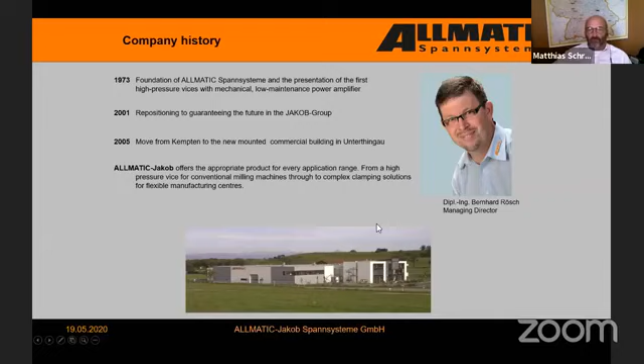In 2005, we built a new plant outside of Kempten, and we moved to this plant, located deep in the south of Germany, close to the border of Austria, and also very close to the famous castle Neuschwanstein. Our company has around 60 employees and 15 to 16 trainees.

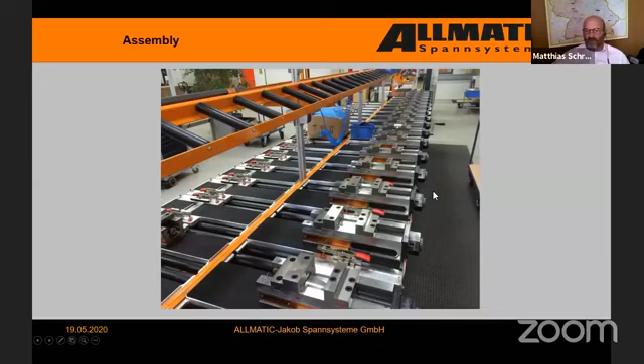Some pictures from our milling department, from inside our company. You will get a video after that. That's our milling area, the grinding division, and the assembly. We assemble the devices in batches between 20 and 100 pieces. I can give you a short video.

Hope it will work. You can see also some snow because we are in the south, very close to the mountains.

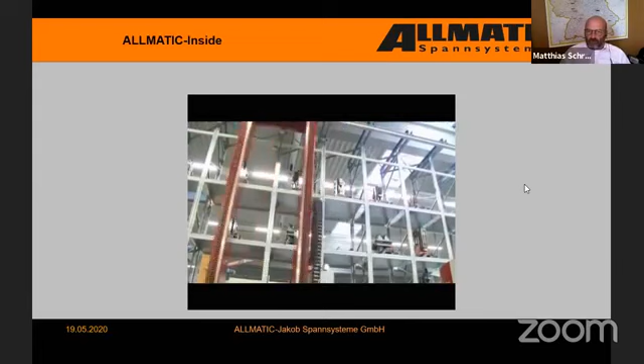Everything is developed by ourselves in our company. We design our products in 3D data, and we produce all the parts and all the devices ourselves. We buy only some screws and small parts; all the other items we need are produced in our factory in Germany.

We use a pallet system from Liebherr connected with two Starrag Heckert machine tools, so we can work without people for one shift.

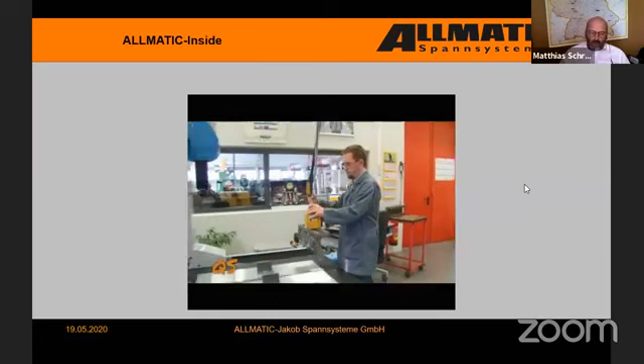Our grinding division is climate-controlled to get high accuracy. For measurement quality control, we don't control every vice; from time to time we keep some samples from the production and check them.

This is our trainee area. The video is not brand new; we've already changed this measuring tool to a newer one.

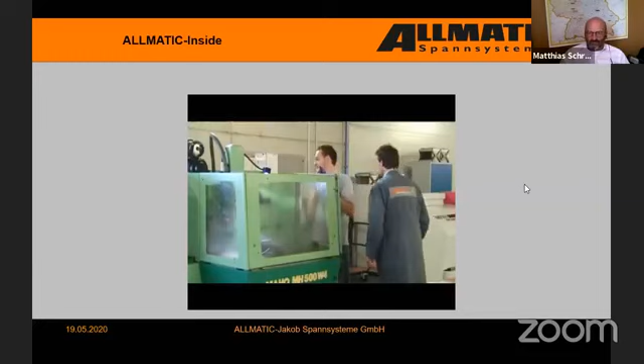And you see, we use our vices also in our own factory.

In 2005, we were the first company to offer gripper technology for workholding, especially for milling machines. Then in 2010, we designed the Central Grip as the next development step of the T-Rex.

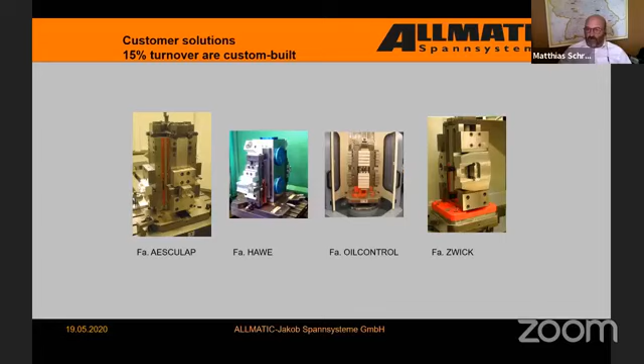The other 15% of our turnover are customized solutions in the shape of clamping towers, setups, special jaw solutions, and so on.

Generally, we divide clamping into two clamping ranges or clamping arts. On one side is conventional clamping, meaning you have a right-angular or parallel workpiece which you clamp on flat jaws.

On the other hand, Allmatic was the first company to develop gripper technology, which gives us the possibility to clamp raw, unmachined parts, castings, and so on — which was not possible to clamp before on a simple vise.

In former time, Allmatic's starting product range was the basic vise. This basic vise we removed from our product range in 2018, but these vises are still under production, under license by AMT, under license from Allmatic. It is branded now for the Indian market, and maybe also for the Asian market, as AMT Allmatic Vise Basic.

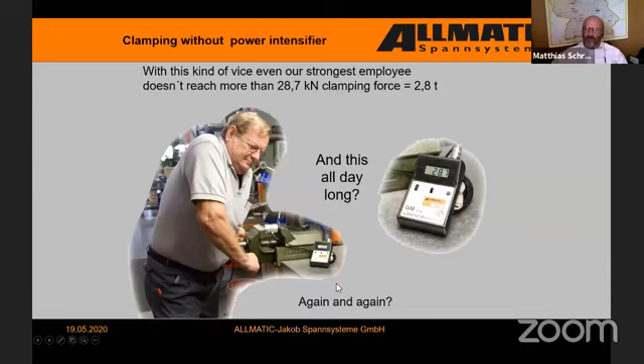With this kind of vises, it is very strange to work, because our strongest guy in the company reaches only 2.8 tons, and he has to do it, or the operator has to do it, the whole day again and again, and that is really bad for the employees. That was the reason why we developed a vise with power intensifier, with power booster. With this kind of vises, even a small lady can reach 4.5 tons or more with very little torque, with very little force. So it is very pleasant, very comfortable for them, and they can do it the whole day again and again, no problem.

The heart of such vises is the power intensifier or power booster, which is fitted into the spindle. We have a very small area, so these items are really small. We have to differentiate between two types of power intensifiers.

In former times, and also a lot of our competitors, especially from Asia, still use hydraulic power intensifiers. That means this is a small hydraulic cylinder where we have a change in the volume of oil. You make a big stroke with low force — that's the torque coming from the hand crank — press the cylinder into the oil, and we transmit a big stroke with low force into a small stroke with high force. So we get the high clamping force at the vise.

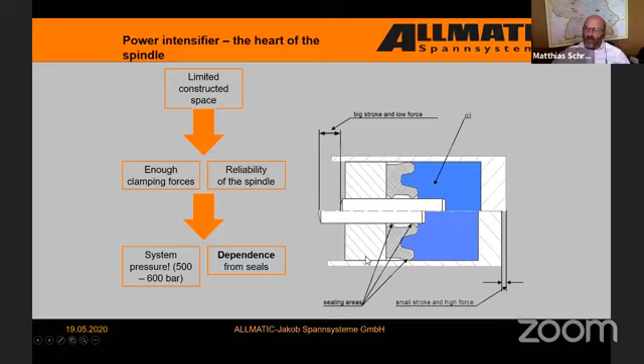The problem with this kind of power intensifier is the leakage of oil. During use of the vise, the sealing area will wear, and so you have a small leakage of oil, and in this case the clamping force will fall down during the machining. And because the power intensifier is inside the spindle, the high pressure spindle, you can't see if there is any small leakage of oil, and you can't feel that the clamping force is going down.

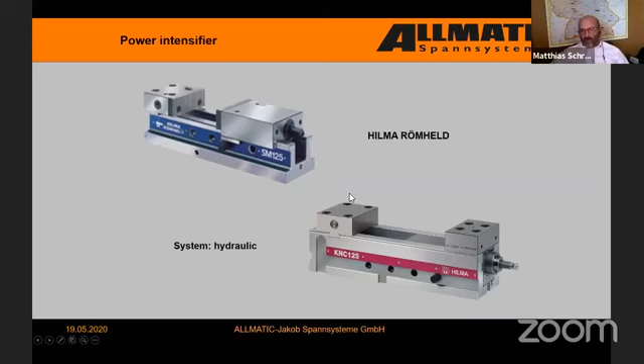Such power intensifiers are still being used also in Germany. For example, our competitor Hilma Römheld is still using this kind of power intensifier on his newest vises, because, in our opinion, it is not safe with the oil with the hydraulic cylinder.

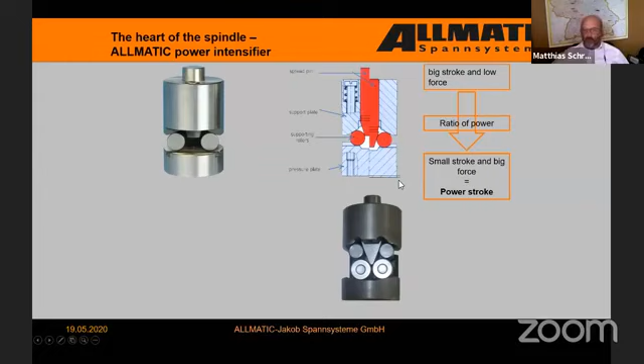Allmatic developed a mechanical power booster, power intensifier. We are working on the same base — we have a long stroke in this area. We press this pin between the rollers; by spreading the rollers, we transmit this long stroke with low force into a small stroke with high force. So the procedure is similar to the hydraulic version, but there's no risk of losing any oil, so we are clamping very safely. This stroke is important for the clamping force — I'll come to this later again. Here you can see how the pin is spreading and transmitting the long distance into a small stroke of the pressure plate.

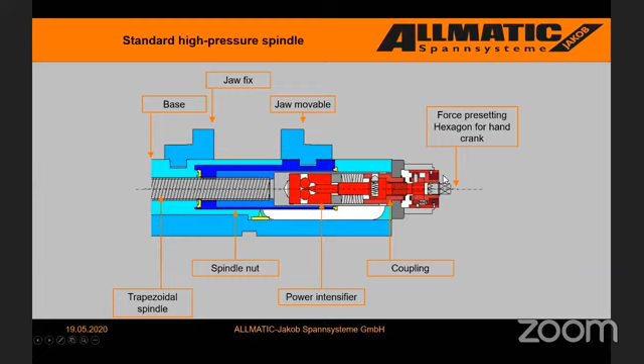Here we can see inside our high pressure spindle. In the area of the hand crank, you can pre-select the clamping force. For smaller vises, you can select it in 11 steps, starting from jaw width 125. You can pre-select the clamping force in 4 steps. So you turn the main spindle with a hand crank. You put the hand crank on the hexagon, turn it, then the main spindle, the main thread spindle, transmits the movement over the spindle nut to the mobile jaw.

If the mobile jaw touches the workpiece, this coupling starts working. The main spindle stops, and the internal spindle starts to work, pressing this thread spindle, pressing the pin between the rollers, like you have seen before. Spreading the rollers produces the small stroke, which moves the whole system, including the main spindle, over the spindle nut and mobile jaw, pressing with high pressure onto the workpiece and clamping the workpiece with high pressure. We will see also a video about this later.

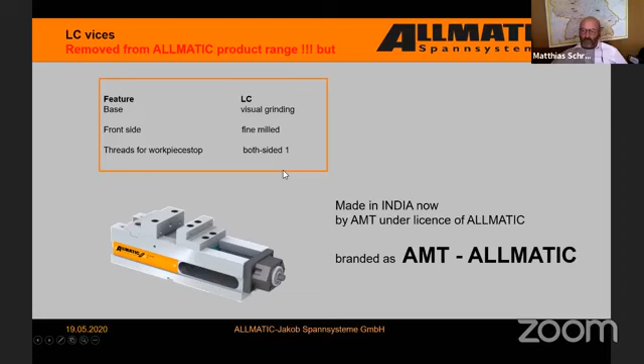Allmatic replaced these 2 types of vices with one vise. So we developed last year the NC8 vise. It is a perfect vise which has all, or nearly all, the advantages of the TC for nearly the price of the LC vise. So the NC8 is ideal for everyday use on milling machines, especially on 3 and 4 axis machines and milling centers. It is used for conventional clamping.

As you remember, we divide clamping into two kinds: conventional clamping and Gripp clamping. The NC8 is for conventional clamping. So you see, we have flat jaws, and the workpieces should have a parallelism better than 0.1 millimeter to get a safe clamping.

We offer this vise in 4 jaw widths. The smallest one is the NC90, meaning the jaw width is 90. The pre-selection at this small vice, as I told you before, you can pre-select in 11 steps. The reason is that smaller workpieces need better adapting of the clamping force to the workpiece. That's why you can pre-select the clamping force in 11 steps at this small vise.

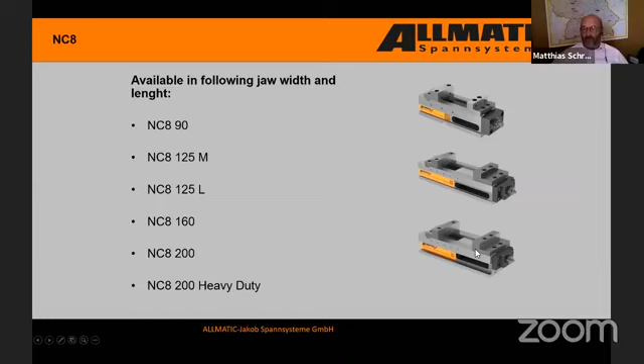Here you can see the two different NC8 125 vises. This is the most common jaw width, 125. That's the reason why we offer two lengths of these vises. The spindle inside is the same; only the body is longer. And if you want to enlarge the clamping range, you have to put the fixed jaw to the next slot.

One new feature of the NC8 is that we can pre-select the clamping force by hand. At our old LC/TC devices, you needed a hexagon wrench to pre-select the clamping force. Now, at the NC8, you can do it by hand. You pull this item, turn it to the next step, and press it in again. So it's very easy.

The clamping force is constant and repeatable, like every high pressure device from Allmatic, by a mechanical power intensifier. I have shown you this power intensifier before.

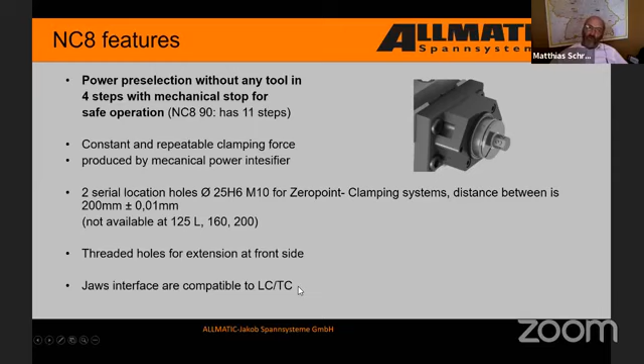All the jaws are compatible to our old LC/TC devices and also to Titan devices. That means if you have bought, for example, an LC device from AMT, then you can use the same jaws also on our NC8 device. The body is ground on all sides for lateral application also, in a tolerance from 0 to minus 50 micron.

The geometrical dimensions of the NC8 are the same as LC and TC. The same I said before. You can use this device also together with the device from AMT, with the LC 125, for example, from AMT. On the side, we have lateral holes for the workpiece stop. You will see it also later.

We have the possibility to connect an angular drive, so that, for example, if the hand crank is in collision with the machine table, you can use an angular drive to turn the hand crank over the machine table. And we have a QR code for access to all technical information, accessories, spare parts, and also repair prices.

In this video, you can see again the function of the main spindle, or of the device, of the high pressure spindle. You put the workpiece inside, move the mobile jaw with the main spindle to the workpiece, then the coupling is working, and the internal spindle presses the bolt between the rollers, spreads, and produces the high pressure over the spindle nut to the mobile jaw.

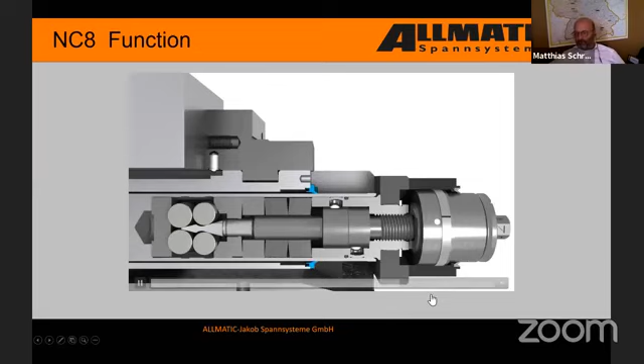The pressure selection by hand, as I told you, you pull this item and press it again back. So we limit the way which the bolt is going, so we can reduce the clamping force and can adapt the clamping force to the required force or the requirements of the application of the workpiece.

All our high pressure spindles are protected by rubber seals, which gives you the guarantee for trouble-free use of these devices. Because it is very important that no chips go in this thread between spindle nut and main spindle, because if this thread is blocked, the coupling of the power intensifier can start working before the main spindle or the mobile jaw has touched the workpiece, and you will not clamp.

So it is very important at all vices, all high pressure vices, not only ours, to protect and clean the main spindle and the spindle nut. There should not be any chips coming into this.

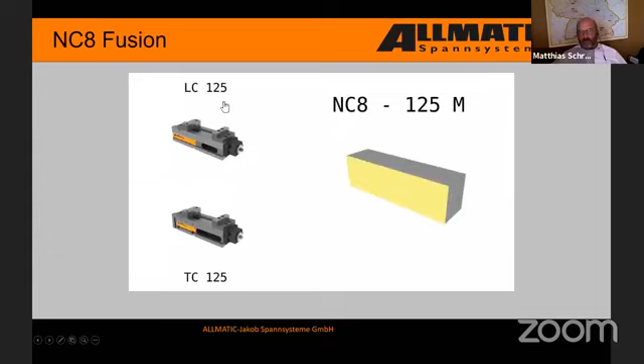So you can see some videos for the fusion of LC/TC I told you we had before. Yeah, LC/TC is still produced by AMT now. So in former times, I told you we needed a hexagon wrench to pre-select the clamping force. Now we can do it by hand without any tool.

The new LC has nearly all the advantages from the TC version. It is ground all around. We have the positioning holes for zero-point clamping systems. We have the threaded holes on the front side to use an enlargement, and the device is ground to use it also on the lateral side.

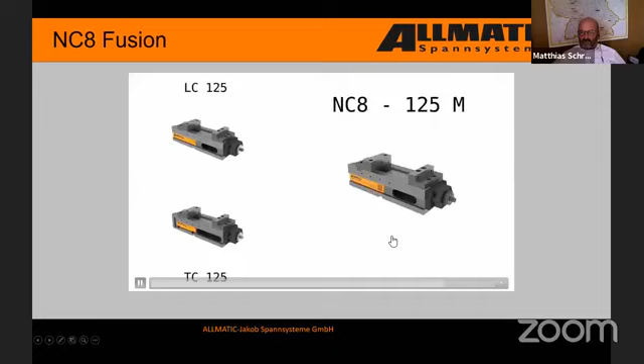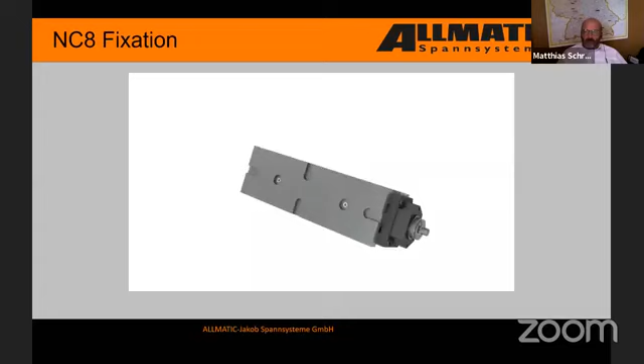Fixation, I told you, we have side shoulders. You can use it, or you can use the zero-point clamping system. As I told you, it fits to a lot of zero-point clamping systems. So you can align it by the aligning slots with aligning stones on the machine table and using side clamps. That's a traditional fixation of the vise.

One more feature is our click system. So devices are prepared to use parallels, which you can click in front of the step jaws, or you can click also some soft jaws or some prismatic jaws on this.

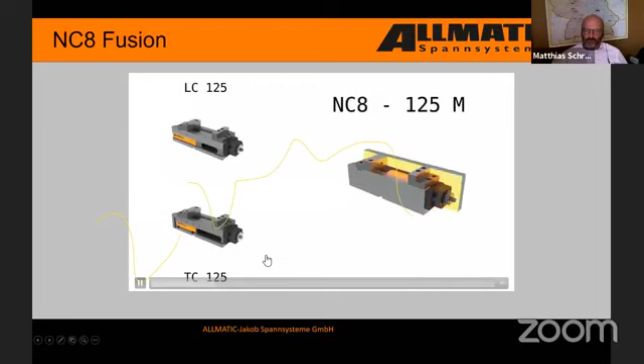I think we saw this also already. Sorry.

Yeah, the angular drive, I told you already, is also a feature. If you want to fit the vise in the middle of the machine table, you cannot turn the hand crank. So we offer an angular drive to come over the machine table, so that you can move the jaws and clamp by hand crank over the machine table.

Enlargement, I told you we have 4 threads on the top side, on the front side in this area, so that we can use an enlargement to get a bigger clamping range. This is not available for the jaw width 90. And 200 is also not available, but from 125 to 160 it is available. So you see we can get a very, very big clamping range.

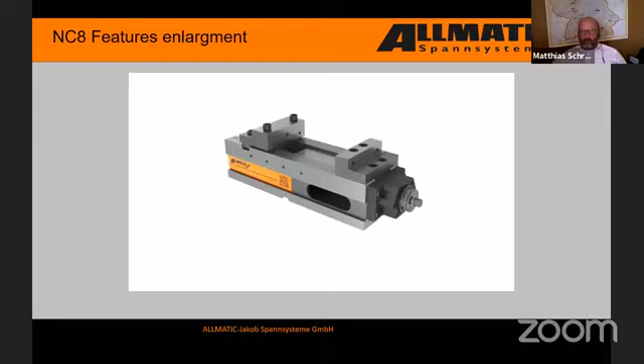The workpiece stop, as I told you: at the LC vise we formerly had only one thread, but now, like at the TC version, with the NC8 we have 4 threads to position the workpiece stop in different areas.

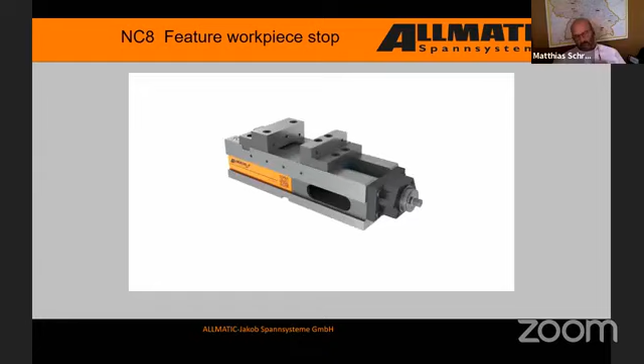One summary of the fusion again. We put these 2 types of vises together into one vise and give it all or most of the advantages of our top class version, and with the price we are closer to the low cost version.

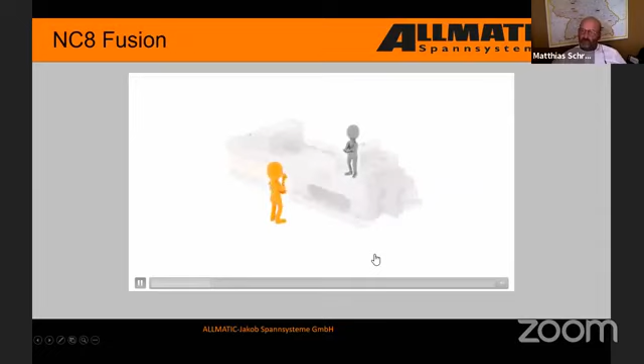Once again, we have 0-point clamping systems. The vises are prepared for that. We can save money by pre-selecting the clamping force, because we don't need any tool to change it.

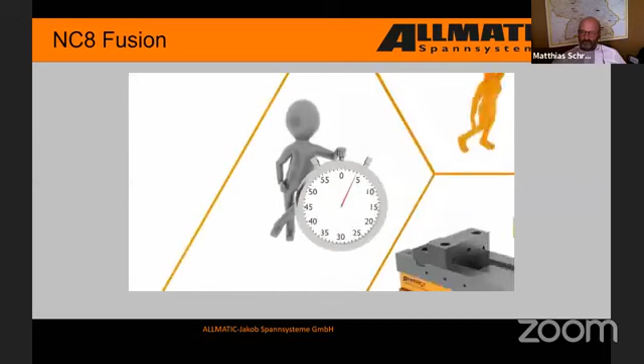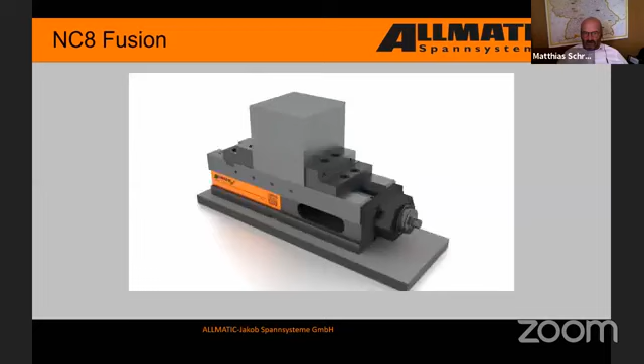The vise is ground on the lateral, bottom and top faces. So we get a very high accuracy and very good parallelism of the workpiece. All the jaws from LC and TC fit the new NC vise. So if you already have a TC or LC vise, you can use the jaws also on the new NC8. And so you can use them side by side also.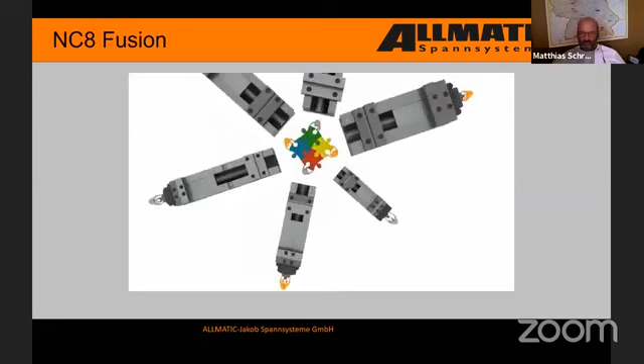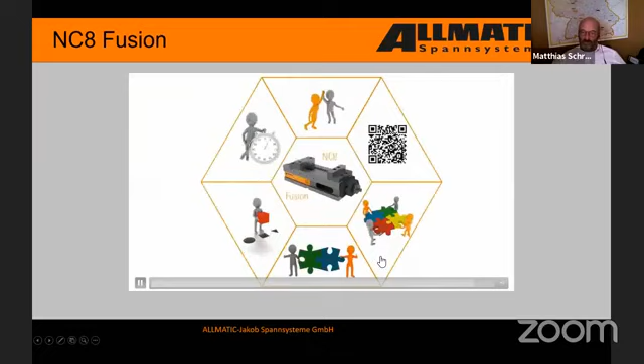In conventional clamping, we also have a double vise. This vise also has a high pressure spindle. You can pre-select the clamping force in 6 steps, but you always have to clamp two workpieces. You cannot have one empty. You always have to clamp on both stations. And the difference between the raw parts can be maximum plus minus 3 millimeters.

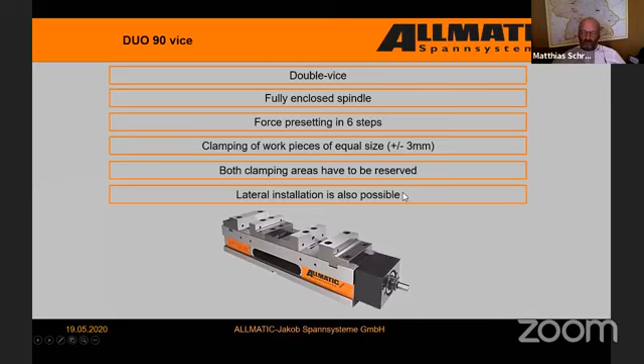We also have the click system. As I told you already, the compensation is plus minus 3 millimeters of the workpieces. The sealed spindle, the mechanical power intensifier, the high pressure spindle, pre-selection within 6 steps, and the aligning slots on the bottom face, and also the 0-point clamping system holes are available on the bottom face of the vise. Important: you have to take care that you always clamp two workpieces. It's not possible to clamp only one component.

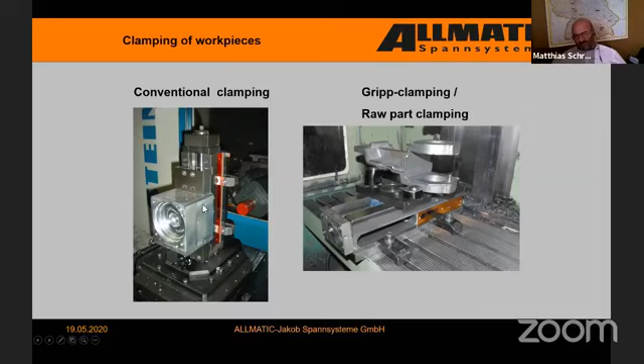Okay. That was the information regarding our conventional clamping vises, NC8. Now we are coming to the Gripp clamping, the clamping of raw parts, where Allmatic is still the leader in this technology. You see, such a workpiece you can't clamp in a conventional vise. So that was one reason to develop the Gripp clamping.

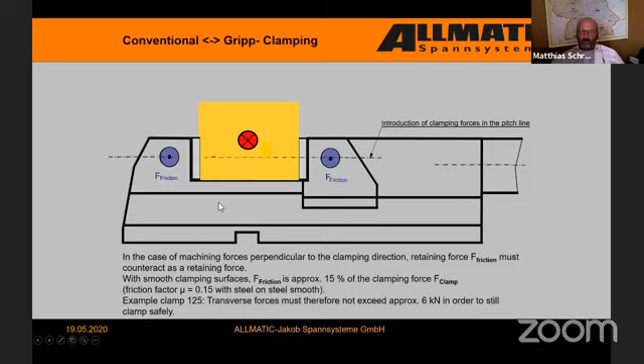The disadvantage of conventional clamping is that only friction holds the workpiece in lateral direction against the cutting force. That means only friction is holding the workpiece, and the friction force is only 15% of the clamping force. If we clamp the workpiece conventionally with 40 kilonewton, and we have only 15% in lateral direction, then we have a holding force of only 6 kilonewton fighting against the cutting force. That was the other reason why we developed the Gripp vise.

Here we see the 2 types. On top, we see the standard, conventional spindle. I told you already how it functions, and you also saw the video. And here we see the Gripp spindle. The main difference lies in this area: we have another power intensifier inside. The stroke of this power intensifier at the Gripp spindle is much higher than at the conventional clamping, because we want to press teeth into the material.

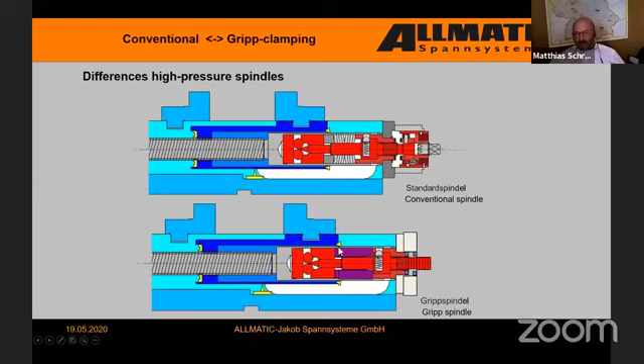We need a longer stroke to press the teeth into the material and to establish additional clamping force. And you see, we have no soft items, no springs inside the spindle, because we need very hard clamping, since we want to press teeth into the material, as we see later. If you have teeth which should go into the material and we had soft elements like springs in the spindle, we would press back against the springs. So it is not possible at the Gripp spindle to use soft elements like springs. So we have a very hard clamping. Here I will show you the differences between the standard spindle and the Gripp spindle.

The standard spindle will be operated by a hand crank. The Gripp spindle, we use a torque wrench. We need a torque wrench because we adjust the clamping force by that. Because the stroke of the power intensifier, as I told you, is much higher. And we don't know how hard the material is that you want to clamp. So we have to limit this clamping force, and this we are doing by a torque wrench. I will explain it later again.

I told you already, we have weak elements like springs in the standard spindle. We have a hard clamping without springs at the Gripp spindle. With the standard spindle we can adjust the clamping force beforehand, because we limit the clamping stroke of the power intensifier by the internal spindle which is pressing the power intensifier. Here we don't know what happens, how deep the teeth will go into the material. So we have to find the limit, and we can pre-select the clamping force over the torque wrench.

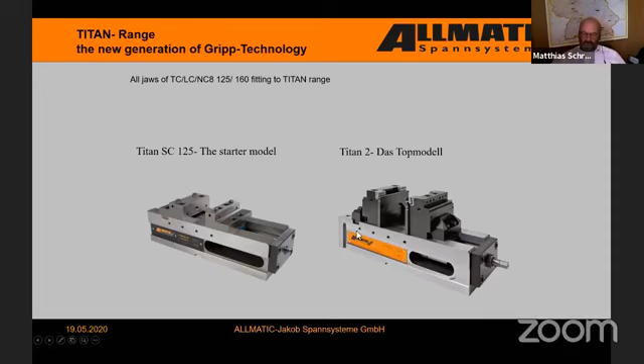We are coming to the Titan SC, this starter model. Normally we offer our Gripp vises without jaws. You get a base with a high pressure spindle and you can select the jaws. But for a customer who wants to start, we think it makes sense to offer it like a conventional vise, including jaws, including the inserts, so that the customer can start immediately.

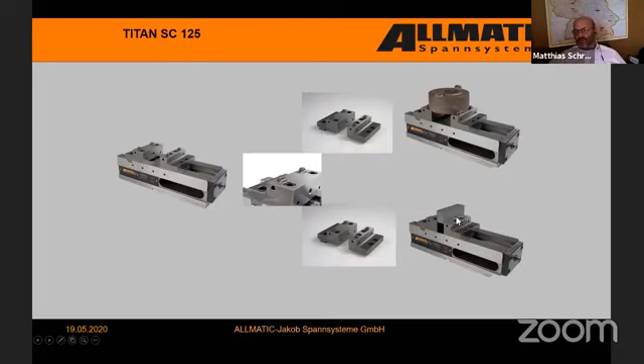You can see with these jaws which we are offering, you screw the inserts on top. And this gives you the possibility to clamp round raw parts and rectangular raw parts. After the first operation, you can change immediately to the flat jaws and clamp the pre-machined workpiece.

The main difference between the two models is the stroke of the power intensifier. At the starter version, we have a stroke of 2.5 millimeters. Here you can see again how it works. We transmit a long stroke into a small stroke with high pressure. This stroke is important for the function of the vise, to press the teeth into the material and additionally to create clamping force. We should have enough reserve to press the teeth into the material, where we already lose some travel, and then additionally to create clamping force.

Once again, the function of the Titan SC, you see the jaws. These are step jaws with threads on the top for the inserts, which you can screw in. This gives you the possibility to clamp raw parts with a parallelism better than 0.5 millimeters, and also clamp round parts.

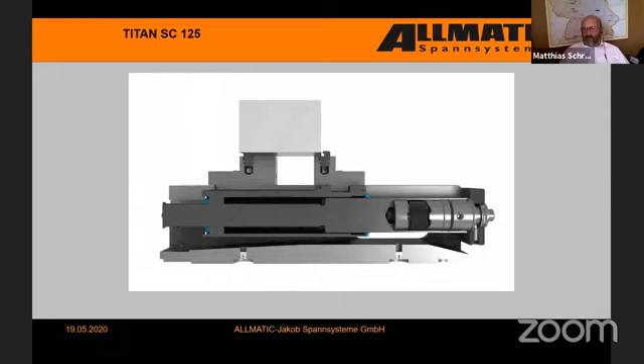You see, the principle of the high pressure spindle is always the same. You move the jaw or the teeth to the workpiece, reach the workpiece, and then the coupling is working. The main spindle stops, and the internal spindle presses the bolt between the rollers and creates the high force.

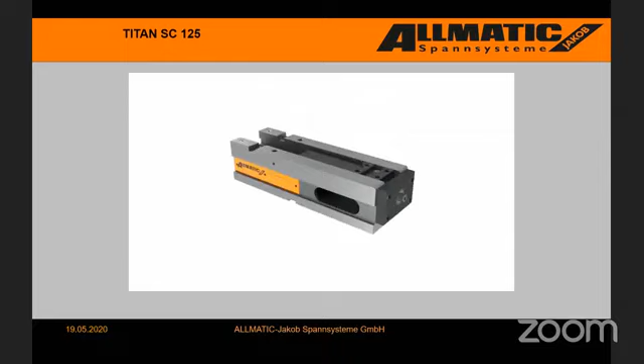This vise is also produced by AMT in India under our license. It is also branded as AMT Allmatic vise TC Titan SC 125. So if you are interested in such vises, you can contact AMT directly.

As I told you, we deliver this vise including the jaws you saw before, but all the jaws from our conventional vises are also suitable on this base. So you can use everything, the pull down jaws, the master jaws, block jaws, soft jaws, and reduced jaws also on this vise.

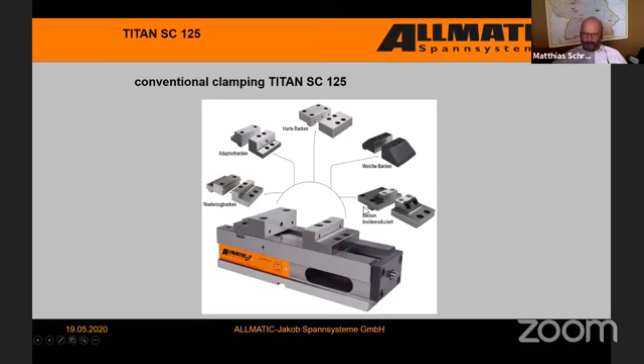So we are coming to our top model, the Titan 2. I think this vise is the most flexible vise on the market in the world at the moment, in my opinion, because we can do everything with it. We offer this vise only in two dimensions, in jaw width or body width 125 and 160.

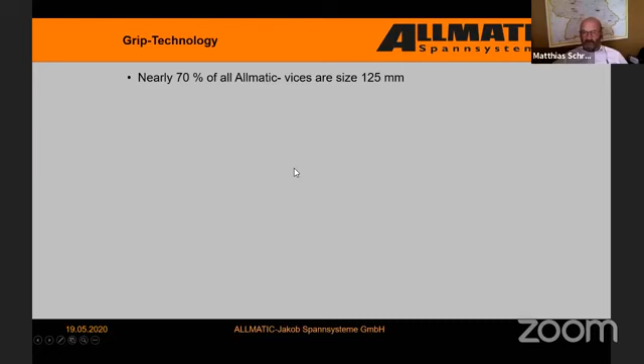Nearly 70% of the vises Allmatic is selling are in the size of 125. That's the reason why in this size, 125, we offer 3 different lengths. The Titan 2K is mostly for 5-side milling. The Titan 2M is a very, very universal vise, and for bigger workpieces, we offer the Titan 2L. It's the same body like the NC8 M and L, as you remember.

On all these vises, you can use an extension. So we have the possibility to adapt this vise not only in jaw width, we can adapt it also in length, in 6 different lengths. 3 plus enlargement, again 3. So that means we have 6 possibilities. And we don't need to enlarge the spindle, because you put only the fixed jaw on the extension.

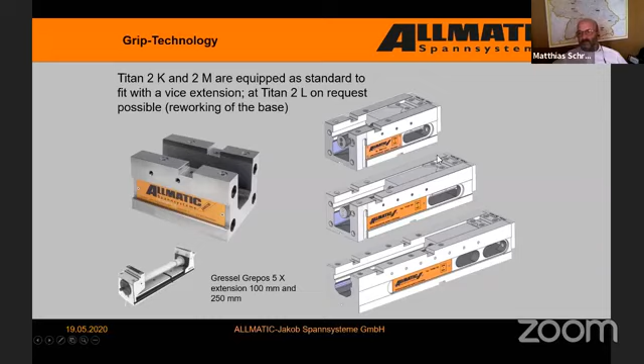Almost all of our competitors I know have to also extend the spindle, which is a problem of costs. If you want to extend the vise, you have to extend the vise itself plus the spindle. At Allmatic, you extend only the body, because our power intensifier is lying in the operator area.

Okay, here we explain again the difference: you cannot grip on our TC, LC, and NC8 vises, because the power stroke is only 1 millimeter, and some of our competitors have less than 1 millimeter in their gripper vises. So it is not a safe clamping.

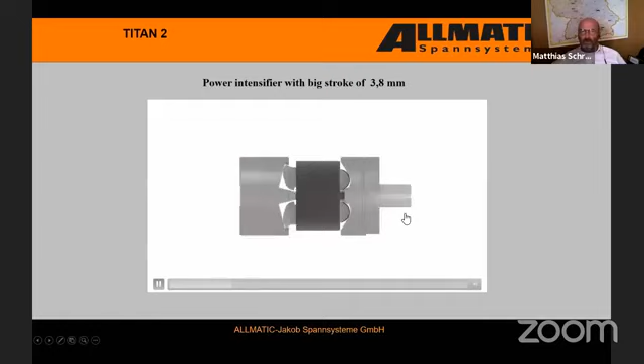At the top model, we have another power intensifier inside with a much bigger stroke. You see the design is different, and we transmitted a very long stroke into a very, very long high pressure stroke, 3.8 millimeters. We need this because this top model can also pull down the workpiece, and for this pull down, we need more stroke. So you see, step by step, we need more and more stroke, and so we developed and adapted the power intensifier.

The operation is done by a torque wrench. The maximum torque we need is 30 Newton meters. With 30 Newton meters, we reach 40 kilonewtons. So it doesn't matter if we clamp on flat jaws, on flat faces, or if we grip. With 30 Newton meters, we always press the teeth into the material, and additionally, we produce 40 kilonewtons clamping force.

Here we compare gripper pressing with our TC or LC vise and with the Titan 2. We do the same with our competitors. Okay, we press the teeth into the material with the TC or LC or with the Gressel vise, for example, but after this, there is no clamping force because they have not enough stroke to create additional clamping force.

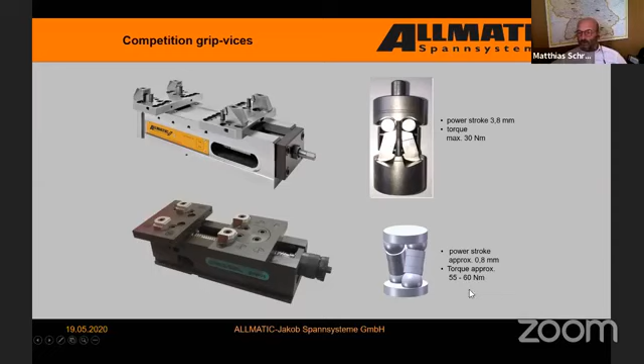Here you can see, and you can think about what will happen. We have a stroke of 3.8 millimeters and a maximum of 30 Newton meters, and they have a stroke of 0.8 millimeters with a torque of 60 Newton meters. And you see the result here between our competitor and Allmatic.

An additional fact is the clamping force on these small marks is less than 10 kilonewtons. So you can be sure you will get vibrations if you do high speed cutting or something, if you want to use the maximum of the machine tool.

Here you can see the new generation of our support jaws. I told you this vise is one of the most flexible vises. On these support jaws, you can use all the small gripper studs or also the gripper set and also the pull down set. I will explain it later, and you will see also some videos to this.

The mobile jaw also has a pivot function. So if you put the inserts into different holes, you can adapt the device very, very fast to different shapes of workpieces. We will see after some examples which are showing this.

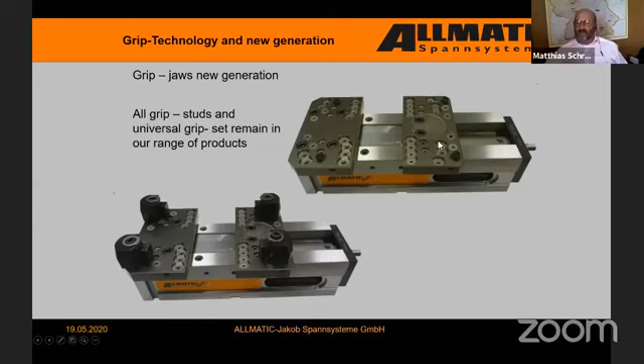Let us see the gripper inserts we have. We have 2 TC gripper inserts, which are screwing into the jaws in different heights with 2 teeth. It's for standard material. Then we have 4 teeth inserts, especially for soft material like aluminium, copper, or brass.

Then we have an insert with a carbide insert for a very high strength material. We have also a flat insert, which doesn't make any marks. This area is coated by hard metal, so that we have a higher friction in this area to hold the workpiece very safe, to clamp it very safe.

And we have a round gripper. This is a perfect gripper in my opinion. It is very easy. You can't make any mistake in this, because you screw it into the jaw, clamp the workpiece, and it is clamped. It is for idiots.

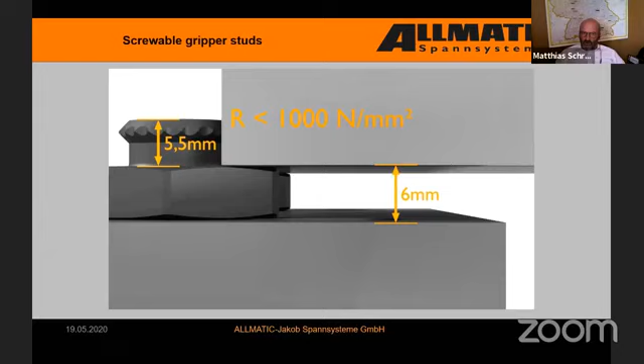This video shows you the different kind of small gripper studs, which you can screw into the jaw, the different heights. This is the flat one. It doesn't make any marks at the workpiece. So the clamping area should be minimum 6 millimeters.

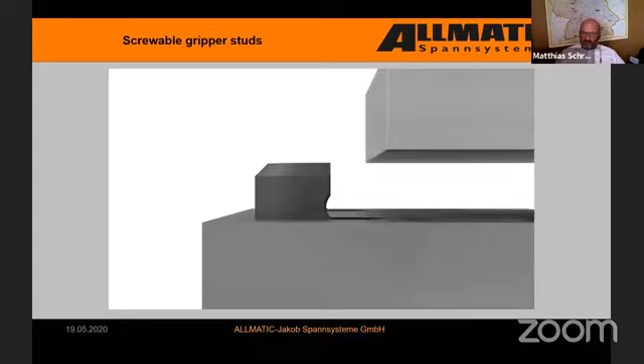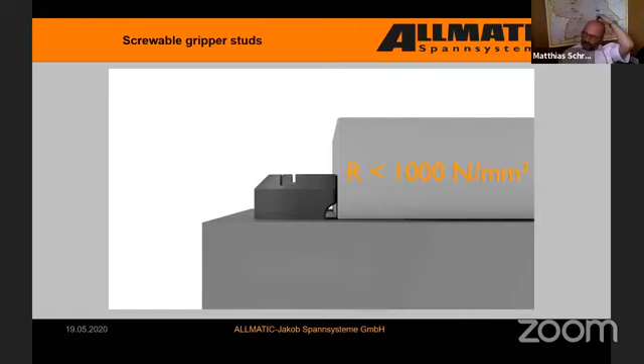Then we have the carbide insert. Here we can clamp materials up to a strength of 1,400 Newton per square millimeter. With our other teeth, we can clamp workpieces with a material of 1,000 Newton per square millimeter. This insert we have in 2 different heights, so the clamping range can come down with the lower one.

And we have an insert with 4 teeth, which is designed for softer material with a strength less than 350 Newton per square millimeter.

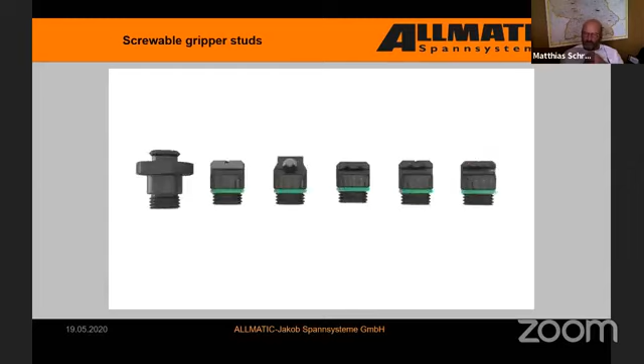The next possibility you have is our universal gripper set. This gives you the possibility that the workpiece can have also different shapes or different clamping height. I will show you a sample so that you understand it. It will be delivered in a box as a set. We call it universal gripper set.

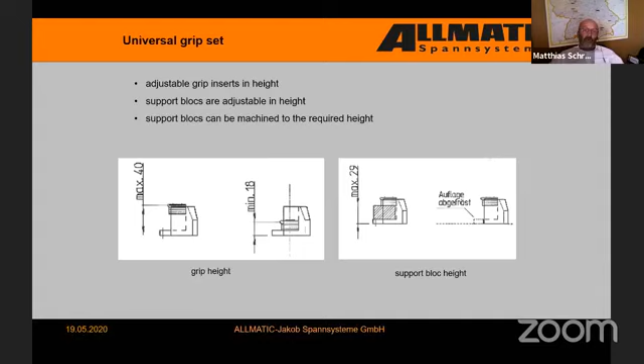And you can machine also the blocks so that you have a different height for clamping. You can clamp the workpiece in different heights, and you can change the support height, so that the clamping depth can also be very different. So I can adjust the clamping height from nearly 0 to 29 millimeters. No, to 40 millimeters. I'll show you a video also to this.

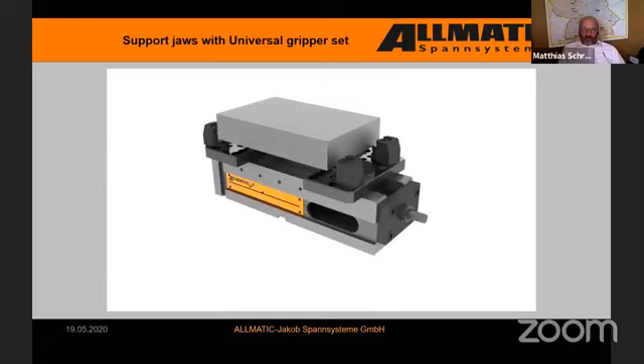Yeah, you can prepare the support blocks in different heights, and then the clamping depth is changing. And you can cut it more on one side, less on the other side, and so we can have also a difference. Or you can adjust it also by screws, which will also be delivered in the box. If you have, for example, only one piece, you can make it really short with the support screws. You don't need to mill the support block.

Here, this sample is showing you that also in Z axis, the workpiece can have different heights. The gripping height is in different heights. In former times, it was not possible to clamp a workpiece like this in a conventional vise. And also our competitors at the moment can't offer this with standard elements, with shortly machined standard elements. So Allmatic in this case is the most flexible vise.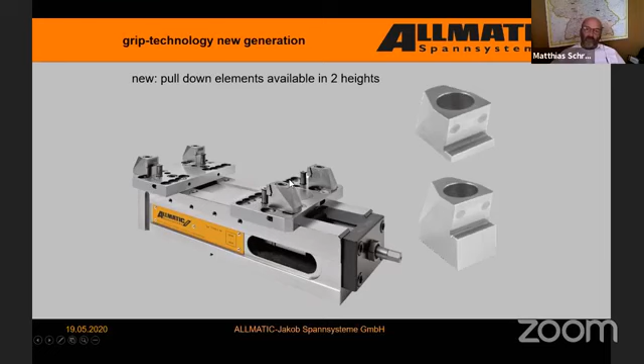The next step is the pull down, which this vise is offering. We replace the universal gripper set by a pull down gripper set, and this we offer also in 2 different heights. The pull down elements and the support heights in 5 different heights.

So you fit the pull down elements on the support jaws, and then you can change the magnetic pins. You can change the different inserts with teeth, flat, with micro teeth, and so on.

We have 5 different heights of support pins. You'll see in the video later, if you pull down the workpiece to the jaw, it doesn't make sense because the jaw is lifting up, especially the mobile jaw, due to tolerances of the pivot function and the spindle nut in the guideways. So the mobile jaw is lifting up, and pulling down the workpiece to the jaw doesn't make sense. That's why we have support pins which we screw through the mobile jaw, as you'll see in a video later.

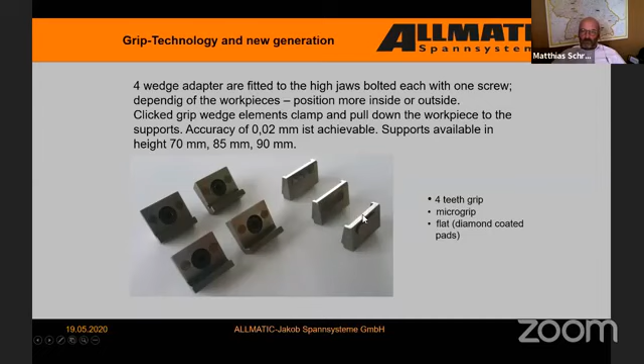Here you can see the different inserts which you can put on the magnetic pins on the pull-down elements. The flat version is also coated by diamonds or hard metal to get higher friction, to make sure the workpiece will be pulled down by friction.

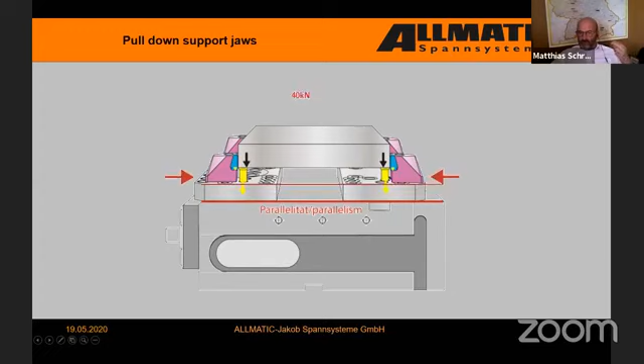Here you can see the function. These yellow pins go through the jaws to the guideways, to the surface of the device, and then we pull down the workpiece to the pins going to the surface of the device. So you have a perfect parallelism situation. It doesn't matter how much the mobile jaw is lifting up or not. So you can get very high accuracy in parallelism, which is the requirement of all customers, I think.

That's the video I told you about already before.

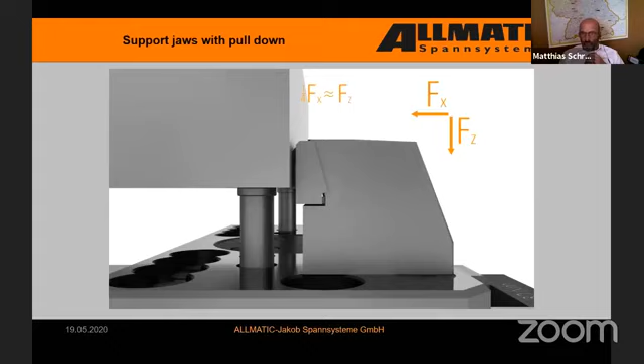You put the pull-down elements in, and you pull down the workpiece to the surface of the device. That's correct. But if you change the elements to another row, and now you'd be pulling down to the jaws, it doesn't make sense because this is lifting up. That's why we designed support pins, which go through the jaw to the surface of the device. Now you get a perfect parallelism of the workpiece.

You have to take care to adjust the support height, or the gripping height, according to the thickness of the workpiece, so it stays in the neutral phase. Otherwise you will bend it, like here. Now you will adjust the support height.

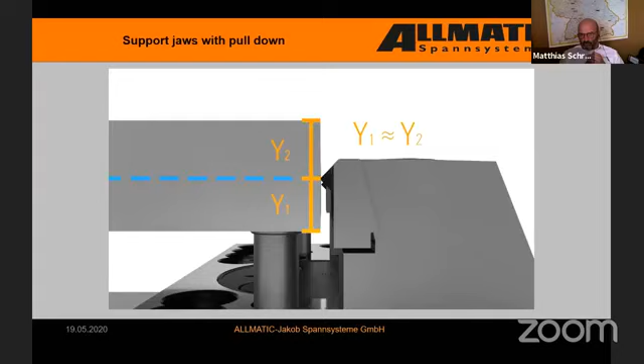That way Y1 and Y2 are similar, and then you will not have any bending, or you will reduce the bending caused by this high clamping force.

You should not turn the jaws, especially the pivot jaw. That's the reason why we have more rows for the inserts on the support jaw.

There are some applications for pull-down of raw parts, for example. In this case, this face was already machined, and we were pulling down this workpiece to the surface of the device to get a perfect parallelism between this face and the inside of the pump house.

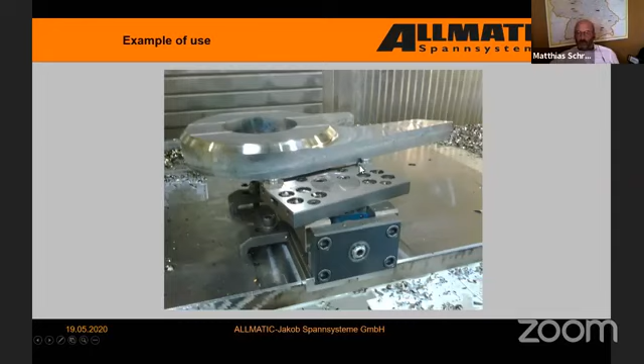Also some examples of Gripp technology for you. These are the round inserts inside the support jaws. So this is a completely unparallel workpiece, but clamped at one height. You see the depth - we can use the maximum depth of the universal Gripp set.

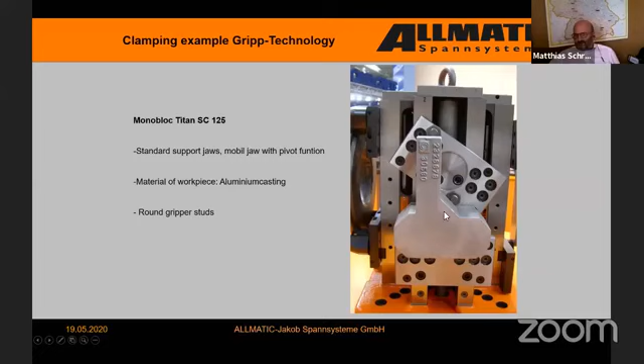Also here, it's a shape from, I think, a golf stick. You see the pivot function of the mobile jaw, so we can adjust it very easily to nearly each shape of workpiece. So we are very flexible - round parts, for example.

For a long time, it was not possible to clamp it with conventional vises. Some more examples in the video.

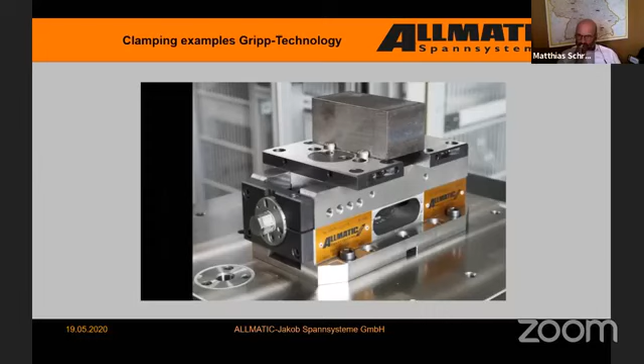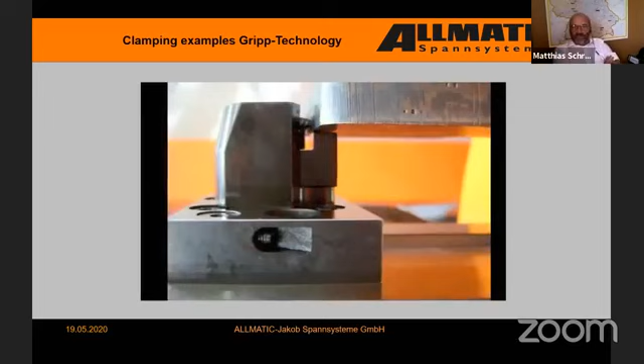Once again, the machine parts you saw before, you saw the raw parts. This vise is also available as a dual vise, so that you can machine 2 operations on one vise. Here you see also how you can adjust the gripping height, the clamping tower, also with the universal gripper set.

We also have an eye gripper where you can clamp radiuses. It is a very safe clamping of raw parts. And Allmatic was the first company offering this for milling.